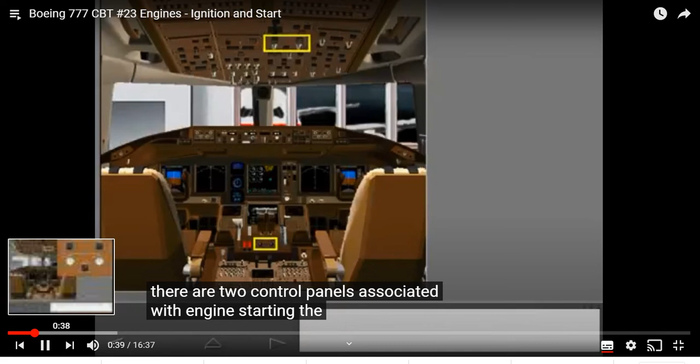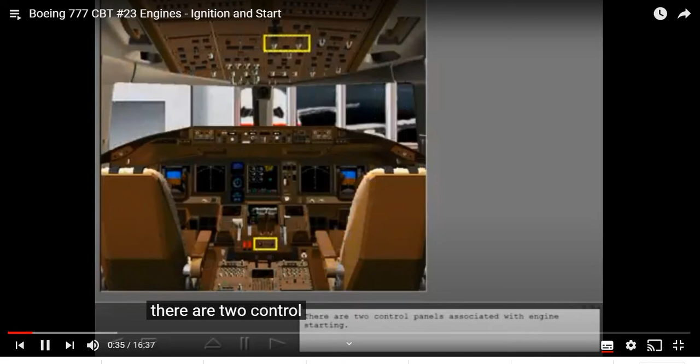There are two control panels associated with engine starting.

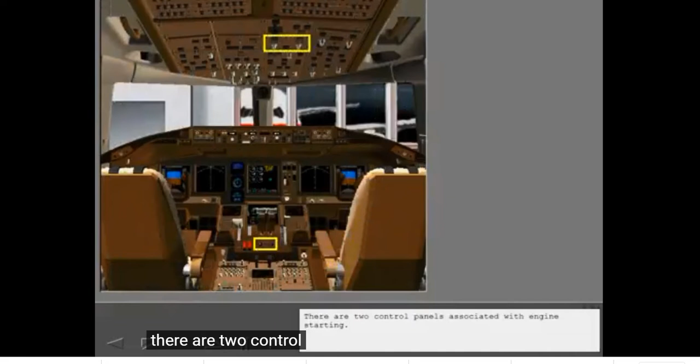Provided by the APU. There are two control panels associated with engine starting. The engine panel is located on the overhead panel, and the fuel control switches are located on the control stand.

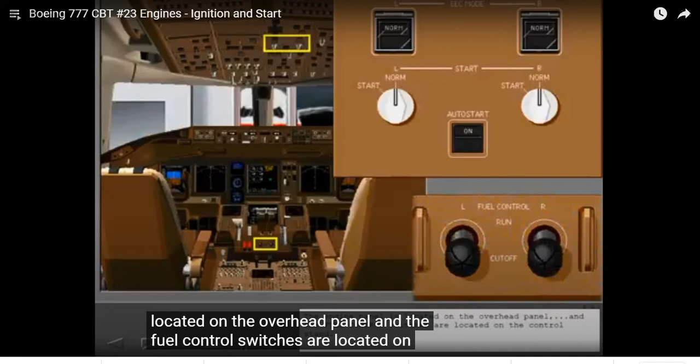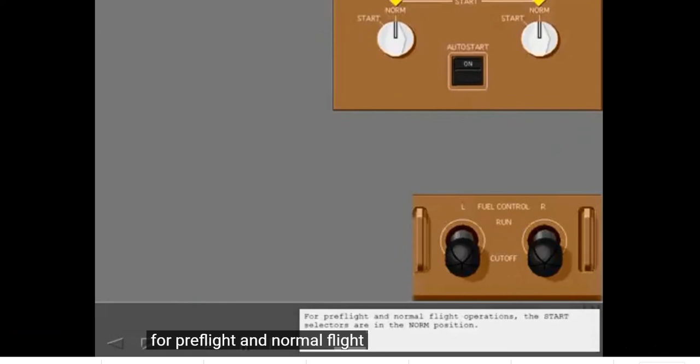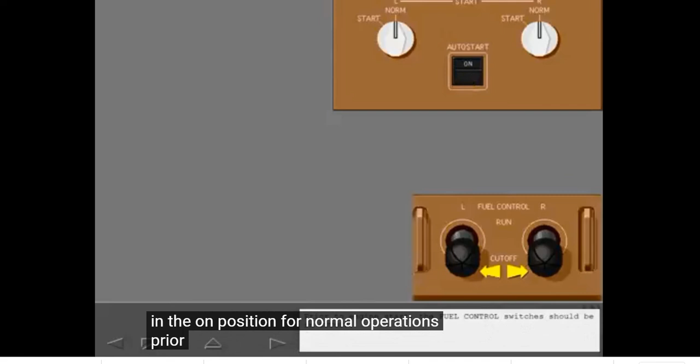For pre-flight and normal flight operations, the start selectors are in the norm position. The engines can be started manually or can be started automatically by using the auto start system. The auto start switch should be in the on position for normal operations. Prior to engine start, the fuel control switches should be in cutoff.

Each engine has two igniters. The EEC automatically uses one igniter for engine starts on the ground. Both igniters are used for in-flight starts.

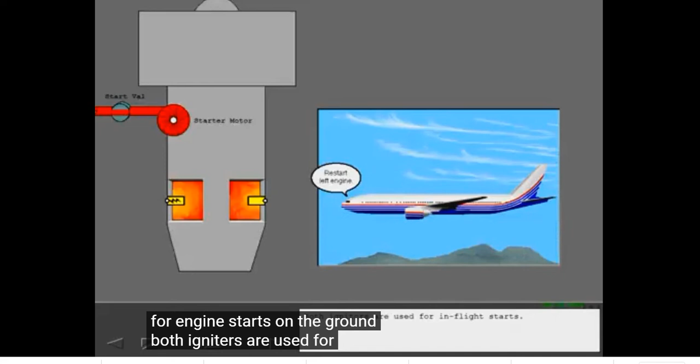Let's examine a normal start sequence. Auto start is used for normal engine starting. Turn on the auto start system. The auto start system uses the EEC to monitor the engine parameters during the start sequence.

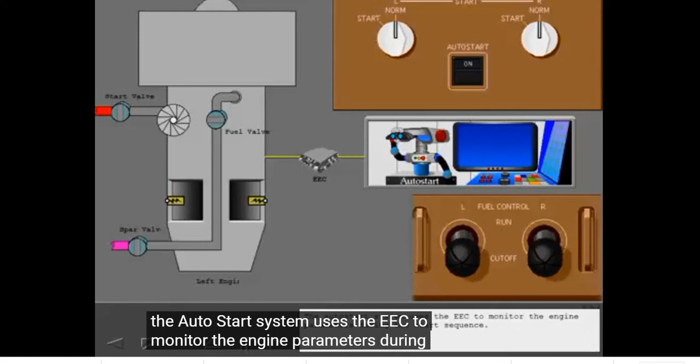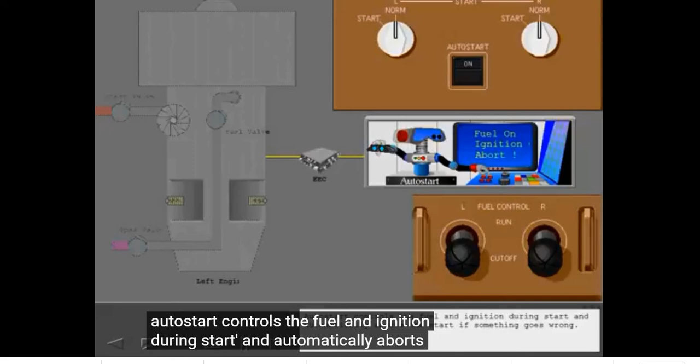Auto start controls the fuel and ignition during start and automatically aborts the start if something goes wrong. Select start on the left start selector. The start valve opens, allowing air to turn the starter.

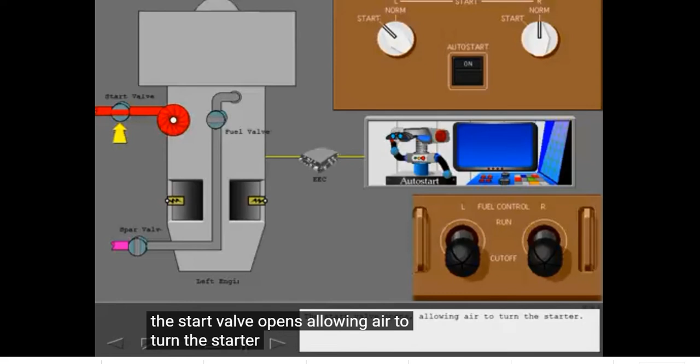During auto start, the fuel control switches can be moved to run immediately after selecting start. Now, select run on the left fuel control switch.

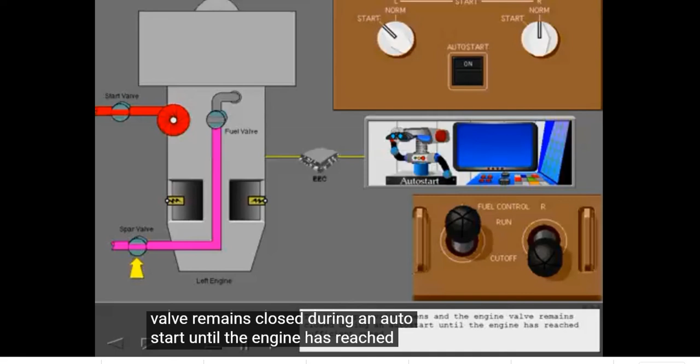The left spar valve opens and the engine valve remains closed during an auto start until the engine has reached sufficient speed. At the appropriate engine speed, the EEC opens the engine fuel valve and energizes an igniter. The EEC automatically selects the appropriate igniter by alternating igniters for each start.

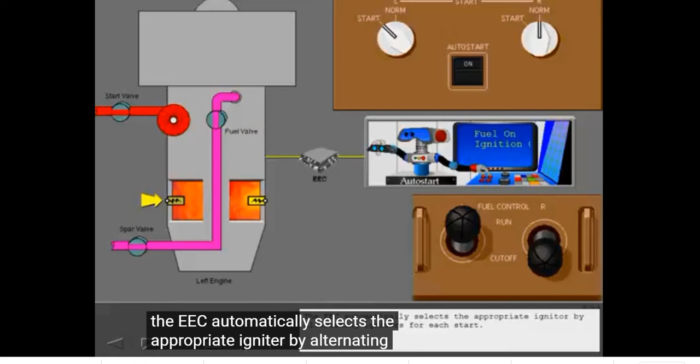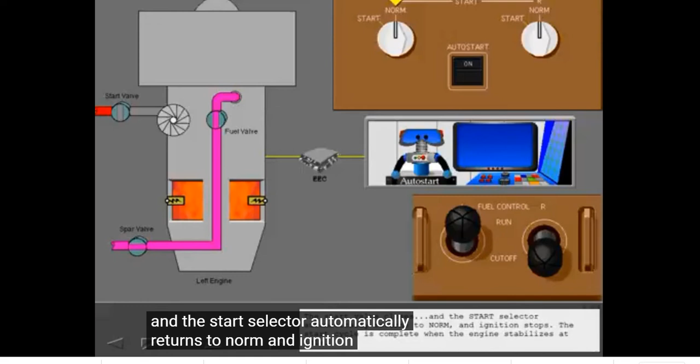The starter remains engaged until starter cutout speed is reached. The start valve closes, and the start selector automatically returns to norm and ignition stops. The start cycle is complete when the engine stabilizes at idle.

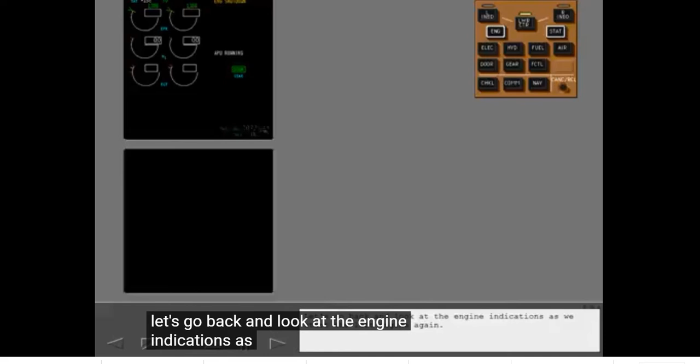Let's go back and look at the engine indications as we start the left engine again. Display the secondary engine indications.

The EICAS advisory message, engine shutdown, appears anytime the airplane is on the ground and both left and right fuel control switches are in cutoff. A red EGT start limit line is displayed anytime the fuel control switch is in cutoff or the N3 RPM is below idle. The line shows the maximum EGT allowed during start.

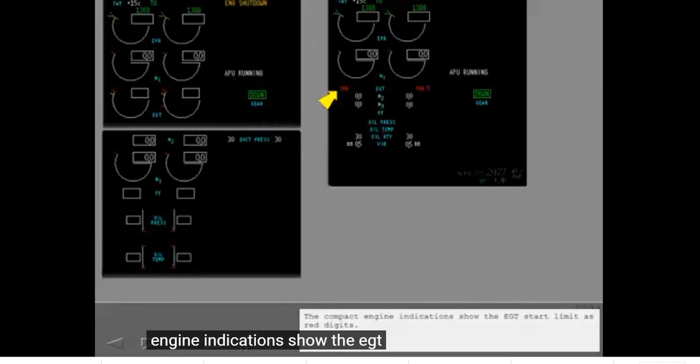The compact engine indications show the EGT start limit as red digits. A duct pressure indicator is displayed prior to engine start. The white digits represent the left and right pneumatic duct pressure in

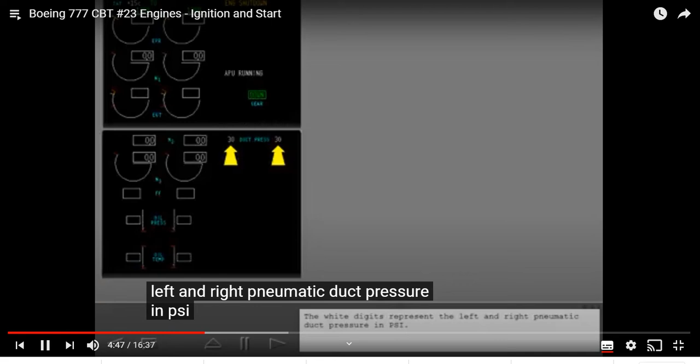PSI. Before engine start, cancel the EICAS message. Now observe the engine indications as you start the left engine.

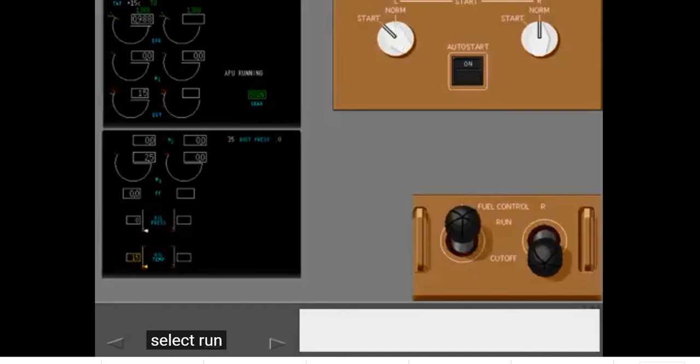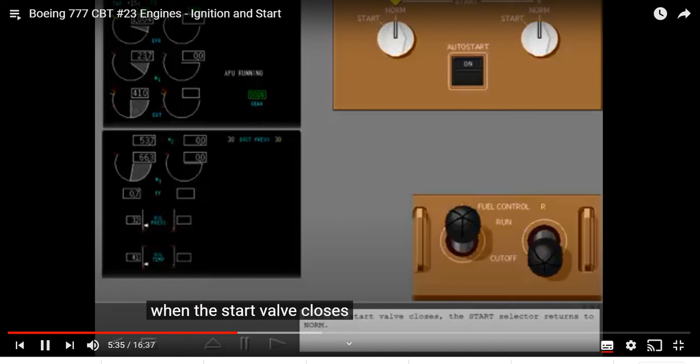When the start valve closes, the start selector returns to norm. When the engine stabilizes at idle, the EGT start limit line disappears.

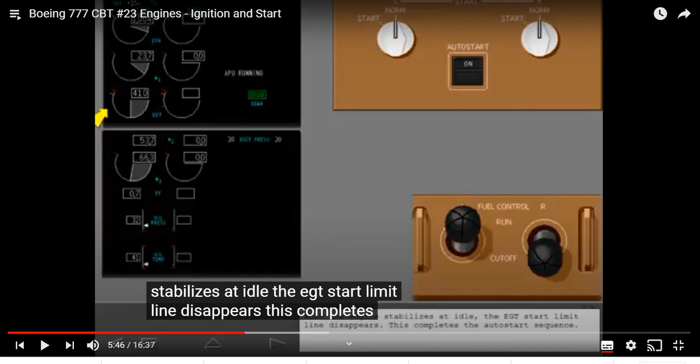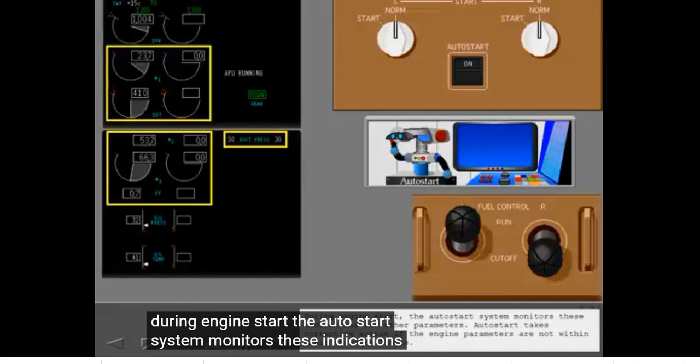This completes the auto start sequence. During engine start, the auto start system monitors these indications and other parameters. Auto start takes corrective action if the engine parameters are not within their starting limits.

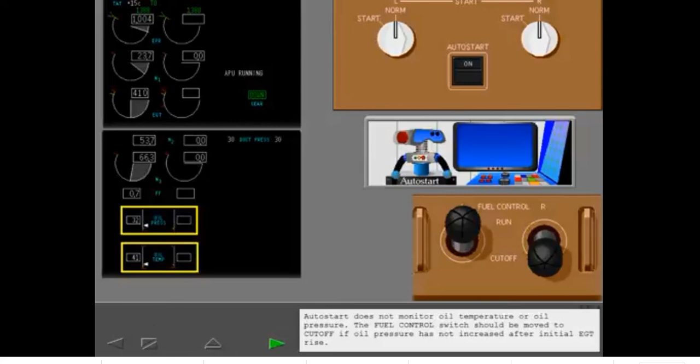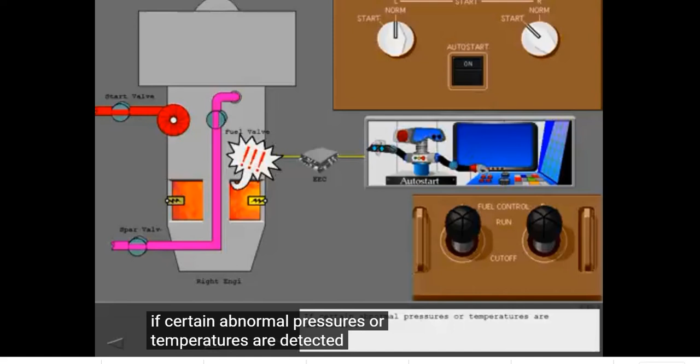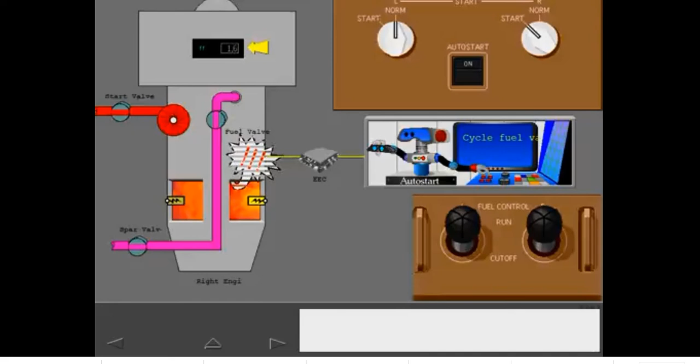Auto start does not monitor oil temperature or oil pressure. Fuel control switch should be moved to cutoff if oil pressure has not increased after initial EGT rise. Let's take a closer look at what auto start does when it discovers abnormal start parameters. If certain abnormal pressures or temperatures are detected, the EEC cycles the engine fuel valve. Cycling the engine fuel valve off then on for a short period of time attempts to correct the abnormal temperatures or pressures so that the start can continue normally.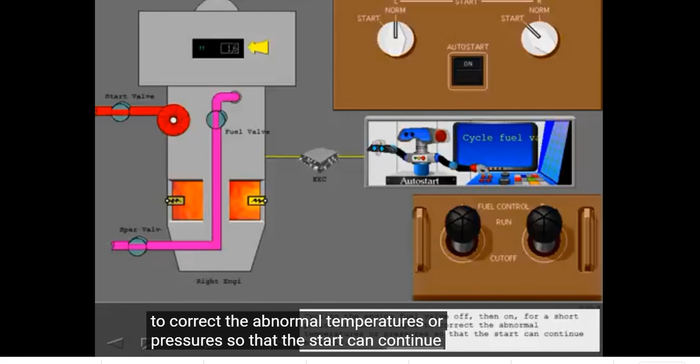For some conditions, such as hot starts or hung starts, auto start automatically initiates a second start attempt. Before initiating a second start, the EEC shuts off fuel and ignition, then motors the engine for 30 seconds. The second start attempt uses both igniters.

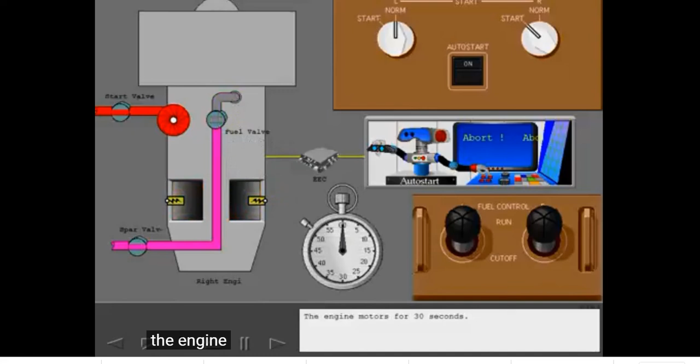If the second attempt fails, auto start aborts the start. The engine motors for 30 seconds. The start valve closes, and the start selector then trips to the norm position. The engine start has automatically been aborted. However, the fuel control switch must be manually moved to cutoff before another start attempt can be made.

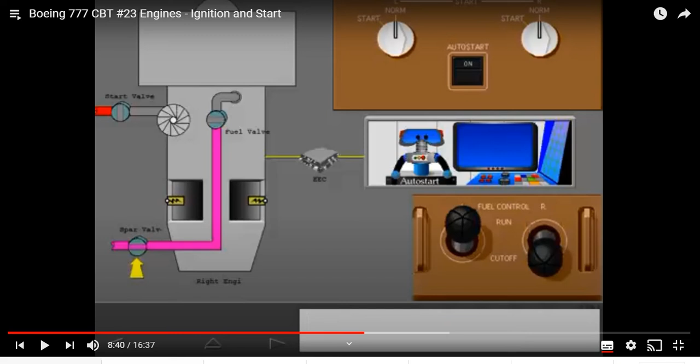Next, we'll look at a manual start. For manual starts, the crew must monitor engine indications and take any corrective action if needed. To manually control the start, turn off the auto start system.

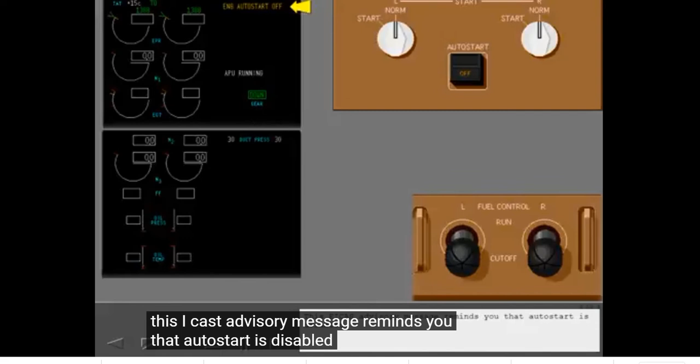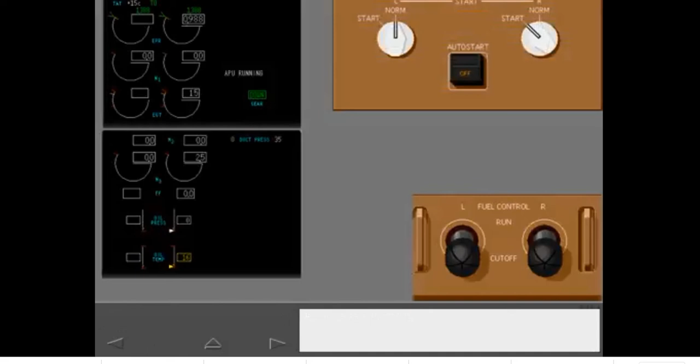Cancel the ICAS message. Start the right engine. Look for an increase in oil pressure after selecting start. For a manual start, the fuel control switch opens both the spar valve and the engine fuel valve immediately. Fuel should not be added until N3 reaches maximum motoring speed. Maximum motoring speed is the maximum speed that the starter can turn N3.

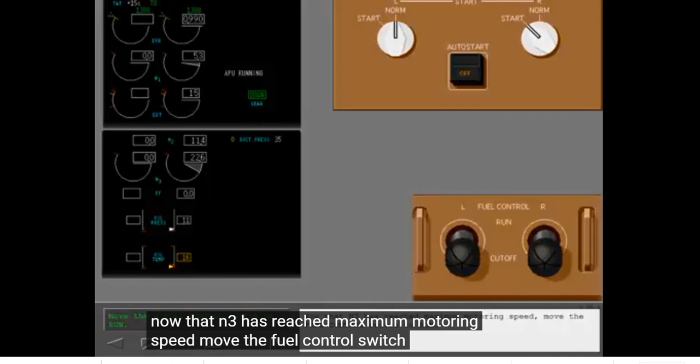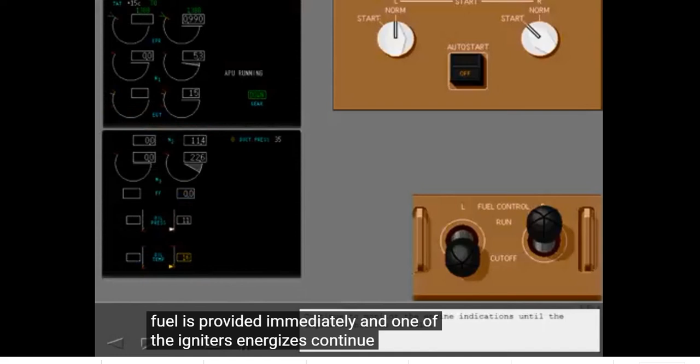Now that N3 has reached maximum motoring speed, move the fuel control switch to run. Fuel is provided immediately and one of the igniters energizes. Continue to monitor the engine indications until the engine stabilizes at idle.

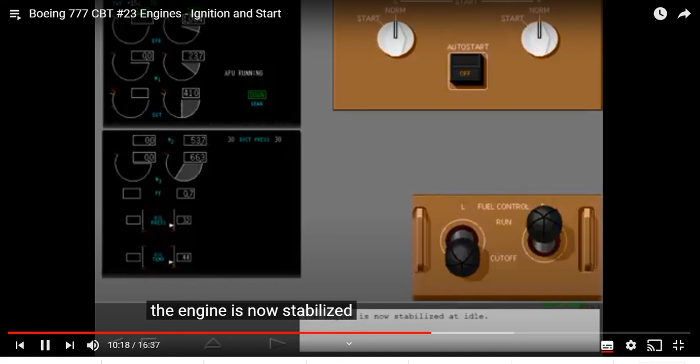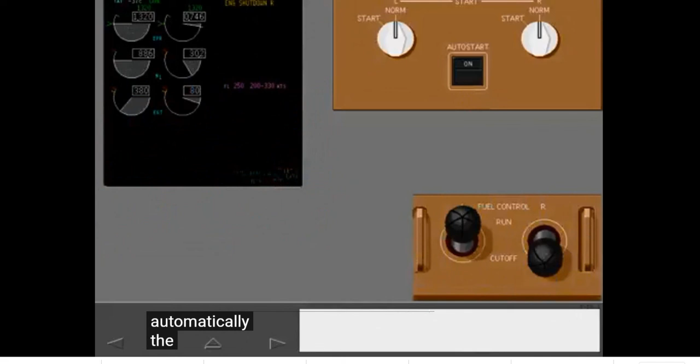In-flight starts can be done manually or automatically. The in-flight start envelope automatically displays on EICAS whenever a fuel control switch is in cutoff or the engine N2 RPM is below idle.

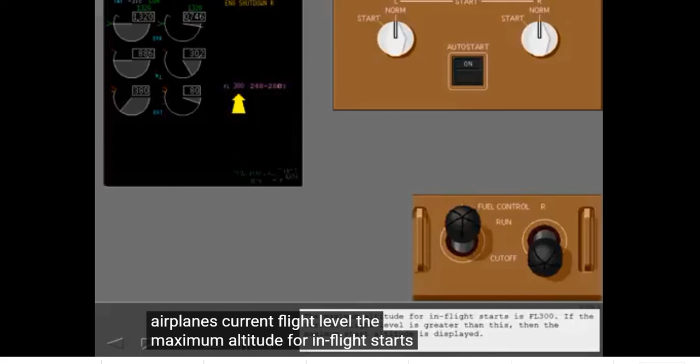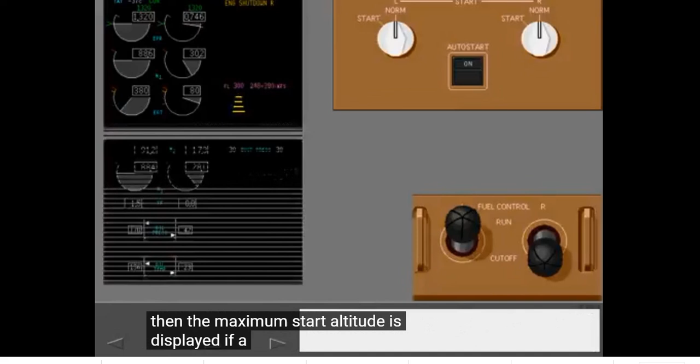The airspeed range that ensures a successful in-flight start is displayed next to the airplane's current flight level. The maximum altitude for in-flight starts is flight level 300. If the current flight level is greater than this, then the maximum start altitude is displayed. If a windmill start can be used, the start sequence is initiated by moving the fuel control switch from cutoff to run.

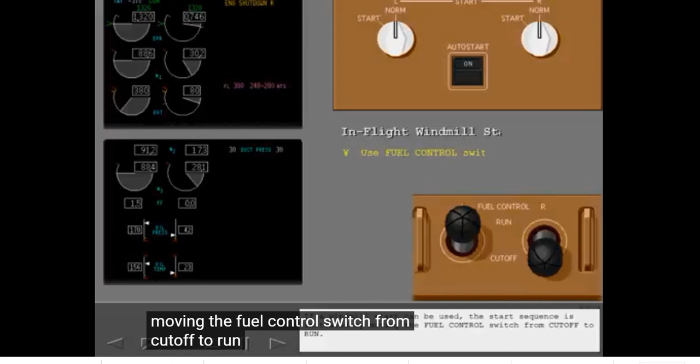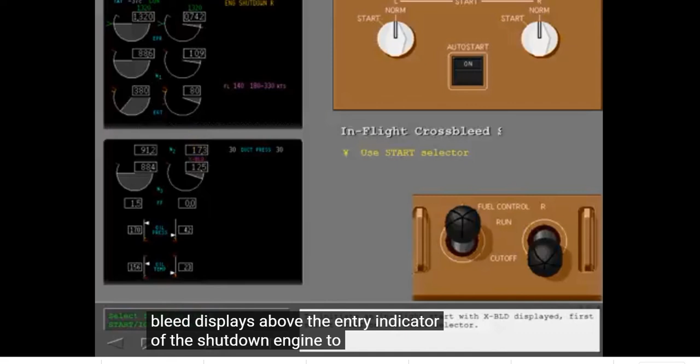Cross-bleed displays above the N2 indicator of the shutdown engine. To initiate an in-flight start with cross-bleed displayed, first select Start on the Start selector. Then, with Auto Start engaged, the fuel control switch can immediately be moved to run.

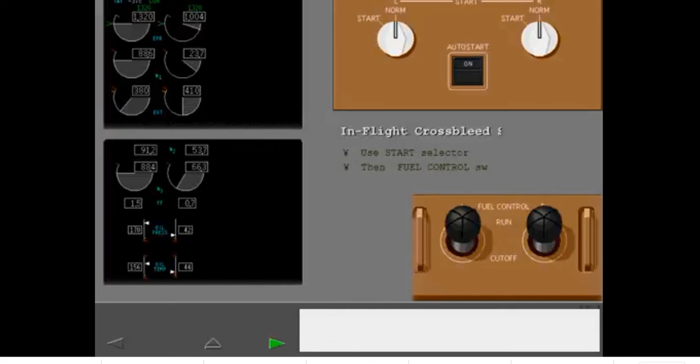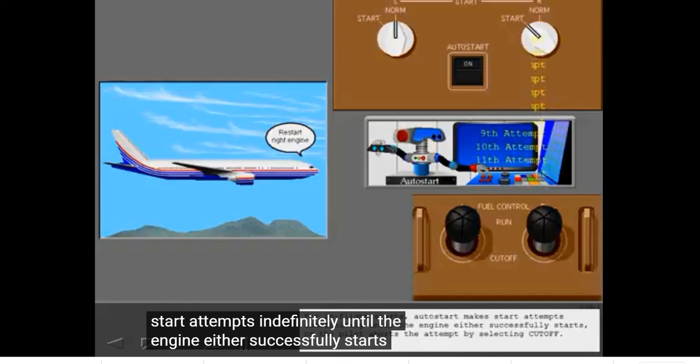Start attempts continue indefinitely until the engine either successfully starts or the pilot aborts the attempt by selecting cutoff.

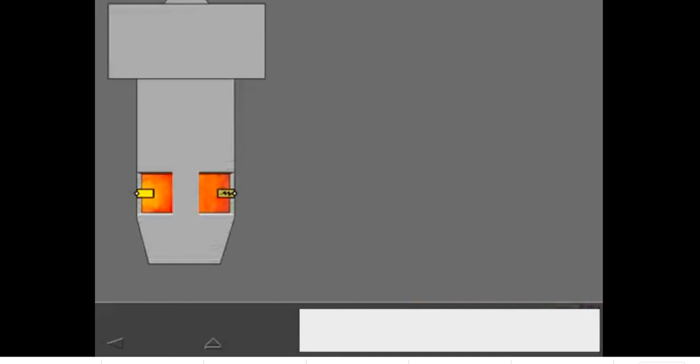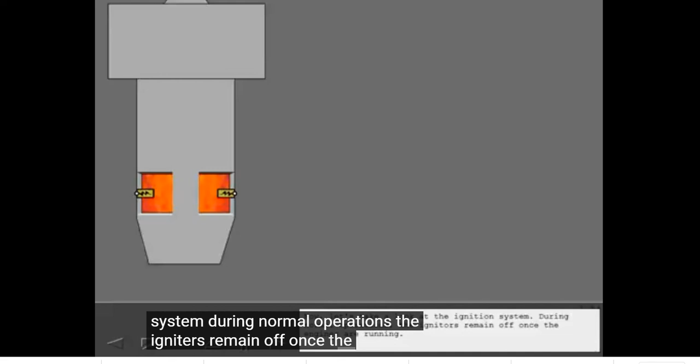Now, let's take a look at the ignition system. During normal operations, the igniters remain off once the engines are running. An auto relight function provides protection against engine flameout and rain or ice ingestion.

Respective engine's igniters are activated whenever the engine is at or below idle with the fuel control switch in run. If the engine does not recover but continues to run down below 35% N3, the EEC shuts off fuel and ignition and disables the auto relight function.

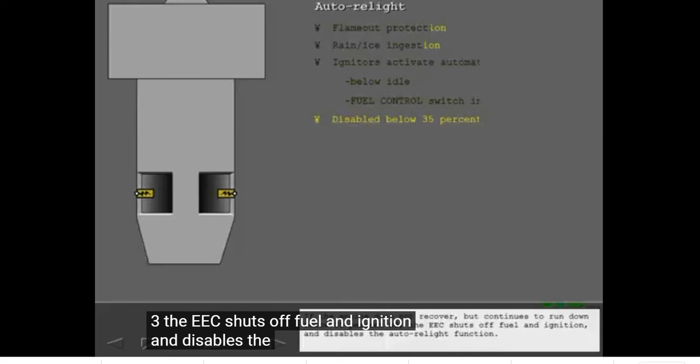Now shut down the right engine.

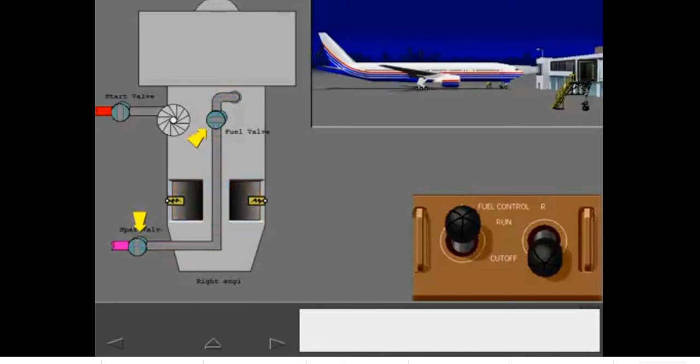The spar and engine fuel valves close, and any ignition that was active ceases, through the fuel control valves. Observe the EICAS display as you shut down the left engine.

Engine shutdown is indicated by a rapid decrease in EGT and decreasing RPM indications.

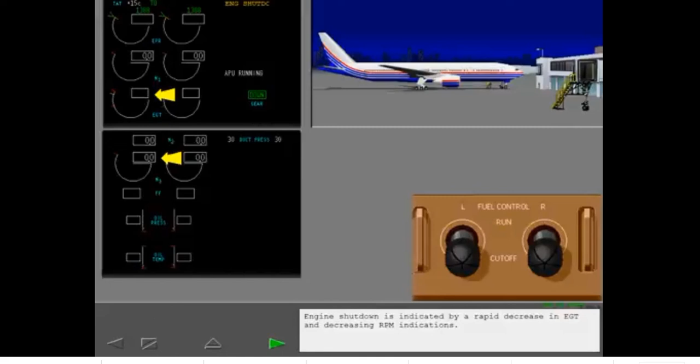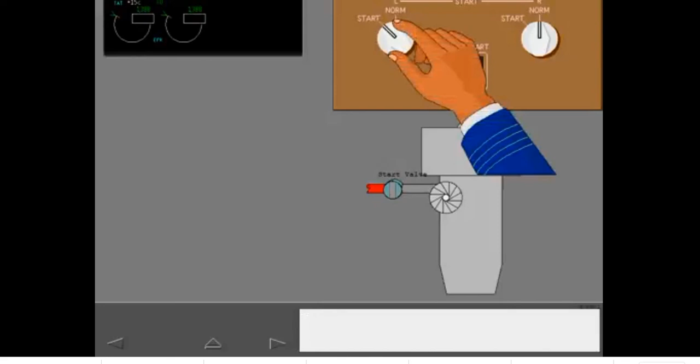If the start valve remains closed when commanded open, this EICAS advisory message displays.

Now, observe the end of the start cycle as the engine approaches idle speed.

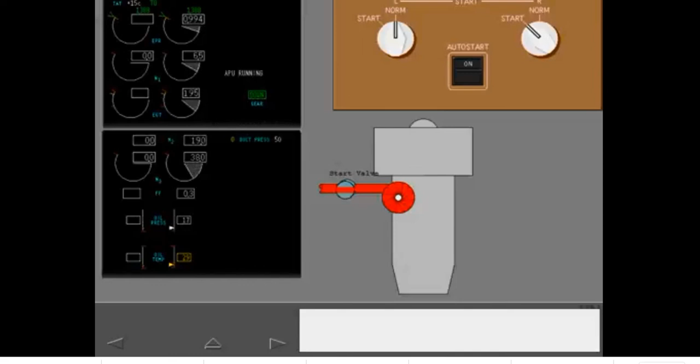If the start valve does not close when it should, then the system commands the start valve to close at 50% N3.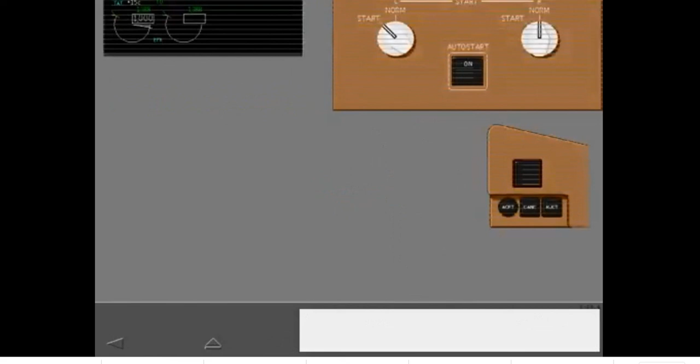The EICAS caution message, engine auto start, can display for any one of the following reasons.

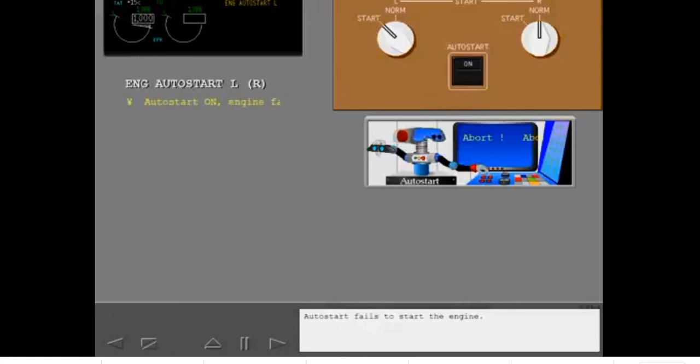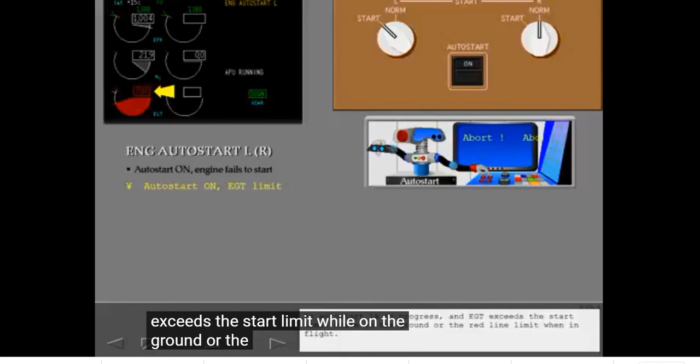An auto start is in progress and EGT exceeds the start limit while on the ground, or the red line limit when in flight. Vamos a tener una luz roja.

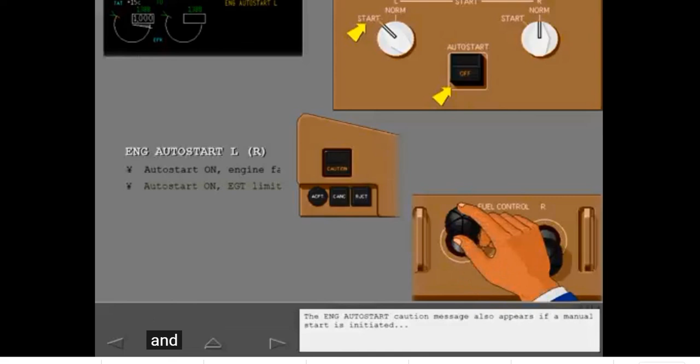The engine auto start caution message also appears if a manual start is initiated, en el cual se tiene que proceder a hacer un arranque manual, and the fuel control switch is selected to run without waiting for max motoring.

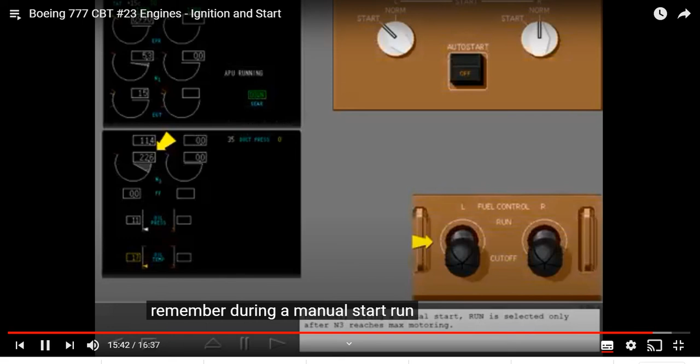Remember, during a manual start, run is selected only after N3 reaches max motoring. Select run on the left fuel control switch.

With auto start off, the crew must monitor engine indications and perform corrective actions for any non-normal situations. If an engine start must be aborted, move the associated fuel control switch to cutoff.

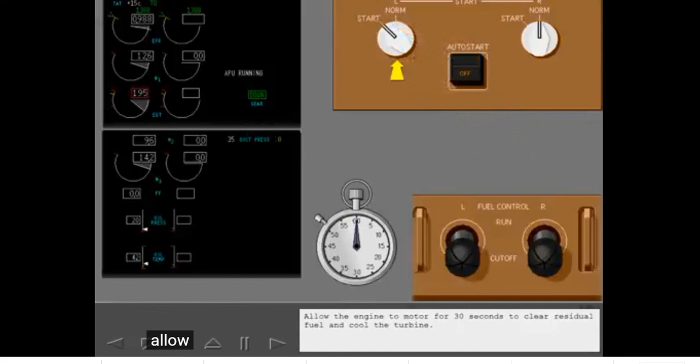Allow the engine to motor for 30 seconds to clear residual fuel and cool the turbine. Then close the start valve by moving the start selector to norm.